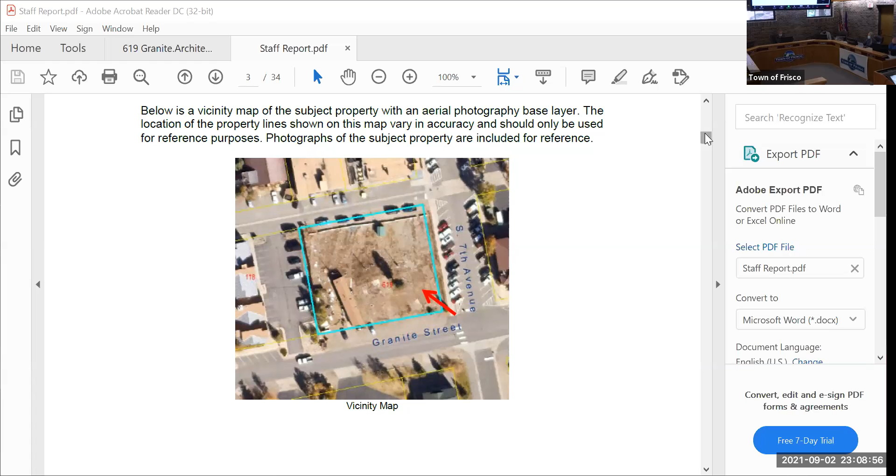As a reminder, at the May 20th sketch plan meeting, commissioners liked how the project was overall, but they did want the architecture to have some modifications. Specifically, the ridge lines needed to be broken up, there needed to be more material accents, and it was requested that the bulk plane encroachments be reduced.

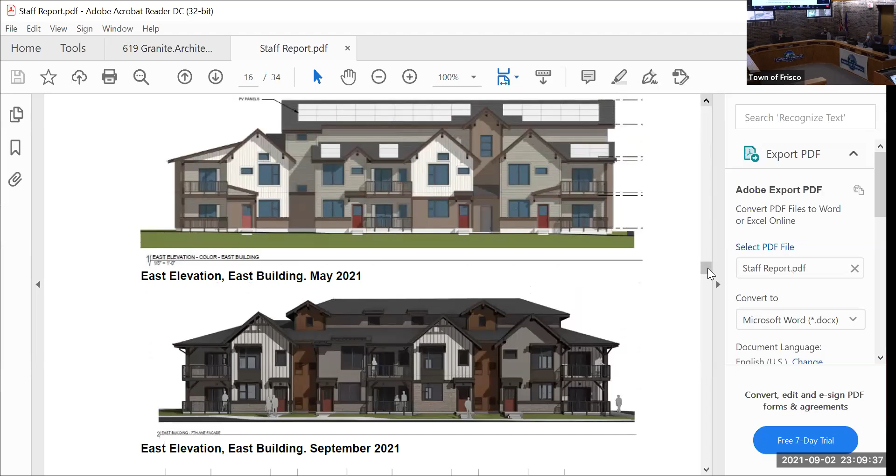So in the staff report, I'll put up on the screen some different images to show the planning commissioners what changes were made, so you can see how they were addressed. The same goes for bulk plane, and the applicant did take the planning commission's feedback and reduce the bulk plane.

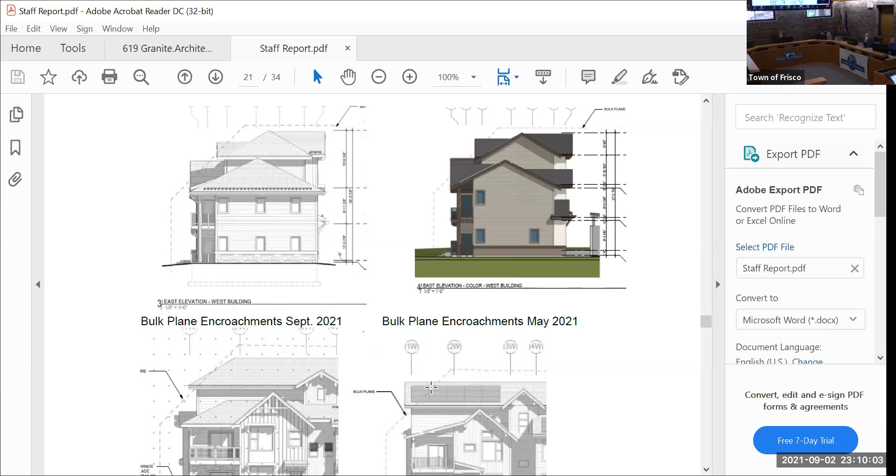I can go to more pictures if you'd like. You can see they still have bulk plane encroachments, but they have reduced them, especially on some of the elevations. For example, the south elevation of the west building was dramatically reduced based on comments that the planning commission provided.

As a reminder, the planning commission can find that bulk plane encroachments up to 350 cubic feet are okay if they provide substantial architectural relief and advance the intent of the section of code. The amount being proposed is approximately 255 cubic feet, which is referenced in your staff report and included in the findings suggested by staff.

The last part of residential development standards to review with you are the proposed exterior colors, which are earth tones including grays and browns. The applicant had modified the proposed white color; they had originally proposed pure white at sketch plan, and that has been amended to be eider white at this time.

Wrapping up the staff report, parking, snow storage, waste, the dumpster, and lighting are all in compliance with the town code. Landscaping is the one other outstanding item town staff wanted to reference. As you saw in the staff report, the landscape plan does not comply with plant sizes, species diversity, and water conservation. We did suggest a special condition that a revised landscape plan showing full compliance with the code be submitted prior to issuance of a building permit.

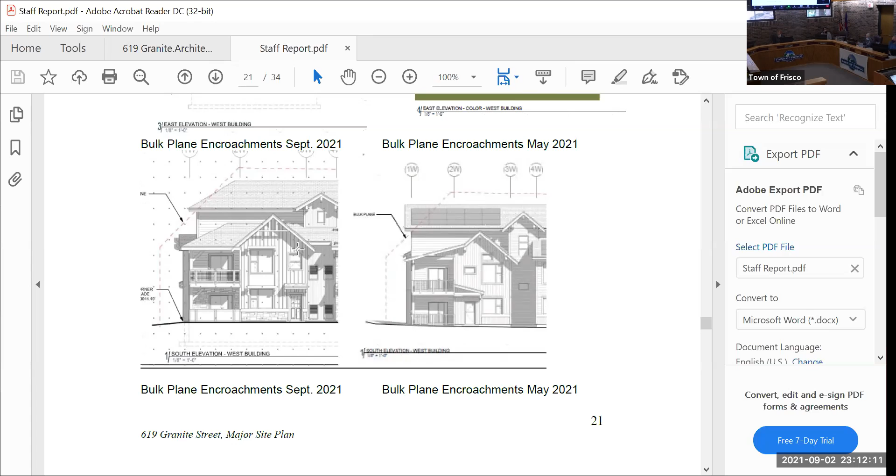As I read it, it's a rental project, right? 22 rental units. Is there any legalese that keeps them as rental in perpetuity? And I know you said some of them are bonus units and some are by right. So as an accessory question, does the scale as to how they regulate the rents come under our purview, or is that not mentioned?

It does not come under the planning commission's purview. Good question. The only thing under your purview related to how the rental units will be rented is to ensure that 7 of them meet the covenant, the town covenant. So now you're making me do math - that leaves 15 more units out of 22. So the other 15, are we assured that they're rental in perpetuity? You cannot be assured, because it's not required by town code.

But CDOT - I'll let the applicant speak more to this - I believe CDOT and the town of Frisco are very focused on providing housing for locals, and that is the intent of the project. My soapbox is rentals, rentals, rentals. That's what's missing in the equation of privately owned properties - there just aren't enough apartments, period. Correct, but we can't require it. I'm gonna take that up elsewhere. Thank you, good clarification though.

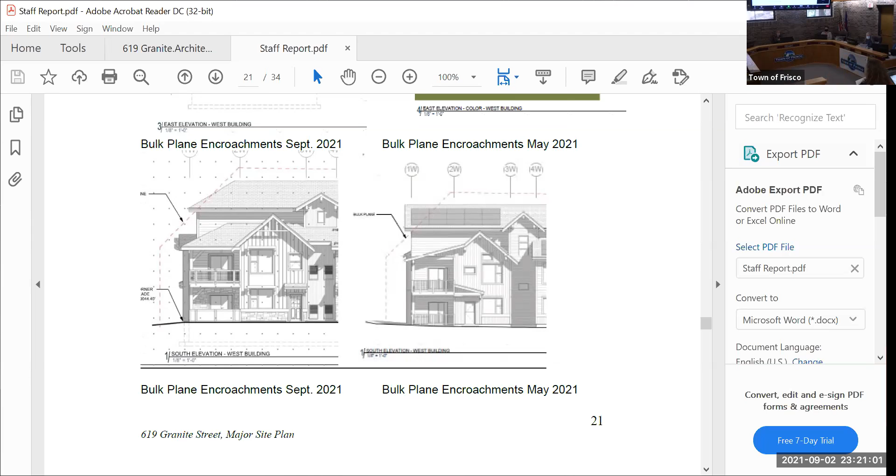Everybody—okay. I know this is very hard because we've all been acting in different roles, but we're doing our best. We are really excited to be here presenting final site plan review for this project. The design you see has been months in the making, a collaboration with town staff, town council, CDOT, and the design team led by Studio Architecture. We've been working so hard because we really want to deliver 22 units of rental workforce housing to the community. The town, town council, and CDOT are all committed to making sure those are rental workforce housing.

As Katie mentioned, 7 of them are required to be deed restricted using the town's restrictive covenant. We're still working out what types of covenant would be placed on the remaining units—it may be the town's restrictive covenant, it may be something stronger, or it may be a combination of the two. Right now CDOT, and I'll let Aaron speak to this in a second, also has their own goals in terms of affordability they're trying to meet for their workforce.

The main goals we collectively established for this project were to maximize the number of workforce housing units we're able to accommodate, ensure high quality livability for residents, maintain affordability, and deliver an energy efficient, sustainable product that meets not only our town code standards but also CDOT's LEED Gold standards. We've been moving forward with those goals in mind, with both CDOT and town council aiming to meet them by working within the town code requirements.

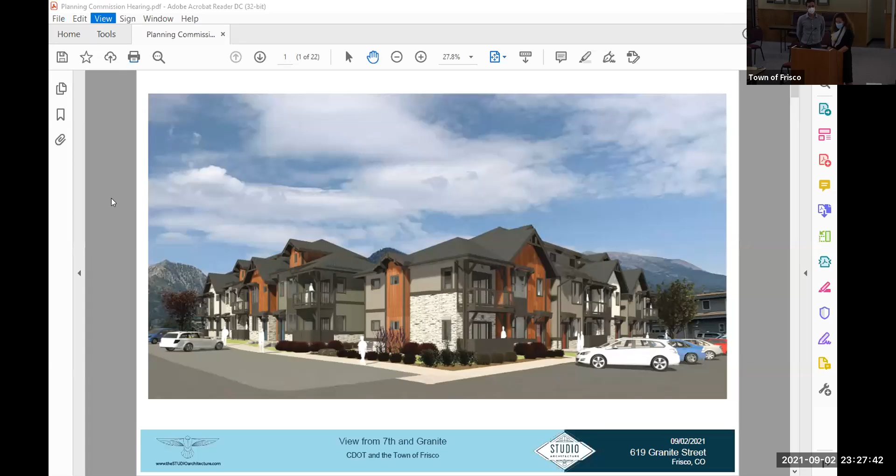There we are. And then you can just drive like that.

All right, thank you. I'm happy to be in front of you in person today, and I know you can't tell right now, but I'm going to try and smile with my eyes since you can't see my face. But let me know if you can't hear me.

Just representing the town and CDOT to present this project to you again, I'm really proud of the process that we've had, the work that we've done with them, and with you, the comments that we've received as well. There's not a whole heck of a lot more for me to say. Katie, I think you did a great job summarizing the project and showing the background in the staff report. Eva, Susan, I think you guys did a great job introducing the project as well, and Aaron from CDOT's perspective too.

So I get the fun job, I get to play cleanup here and talk about the fun architecture. But what I'll do is dive a little deeper into the efforts made since our last meeting with you guys, as I think Katie did a great job in her staff report showing where we were and where we are now, based on comments and the collaborative efforts of this entire team.

So what we did over the past month or so since we met with you, we toiled with the whole design team - this was the town of Frisco, this was CDOT, this was the studio group as well.

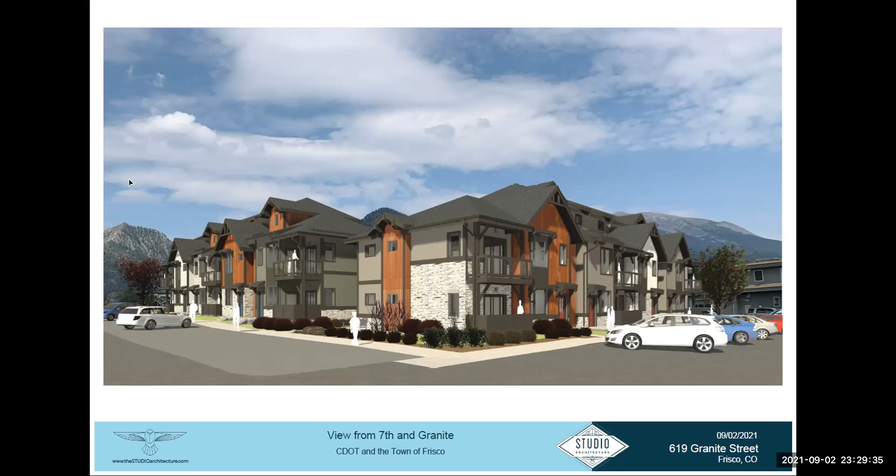We toiled with the ways to integrate comments from you guys in a good way - how do we integrate these comments, how do we improve the building and the architecture based on those comments to really balance the things already talked about: code compliance, the vision of the town staff, the vision of town council, the vision of you guys as plan commissioners, the vision of Frisco as well as CDOT as the owners. So that's what we've been working on.

And I think we're all really excited to present this project to you, as you can see on screen, what an exciting project it will be for the town architecturally speaking, and to deliver a use that I think is much needed, that everybody knows about for housing.

But a lot of what plays into the power of this project is such an amazing site for this. There's access to amenities - retail, recreational, religious amenities. It's in downtown, close to the highway for the CDOT employees. There's a lot of great access there, and it's going to be integral to what makes Frisco such a great place.

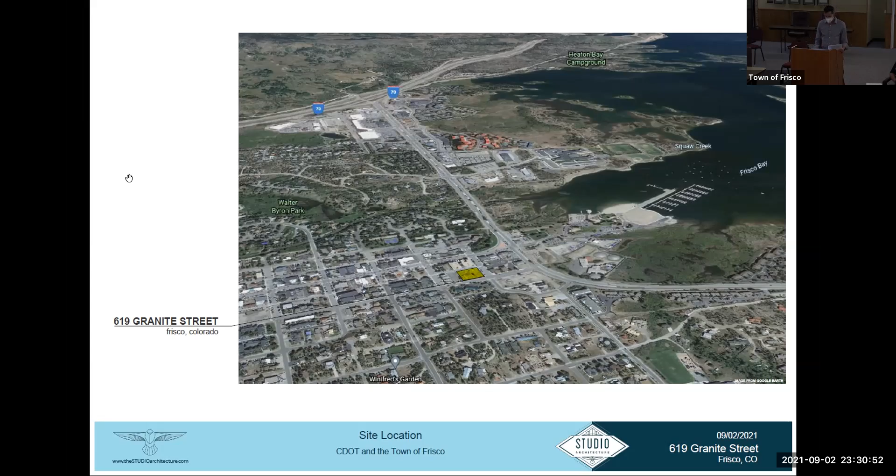The site plan - we've talked about the technicalities of this and quite honestly not a lot of that has changed since we last met with you guys. As Katie and Susan mentioned, there's two buildings, one facing Granite, one facing 7th Ave.

There's a Paseo we don't talk about a lot that bifurcates both of the buildings, and that allows permeability and walkability to the public into this site, which is part of the vision of the town code. There's 11 units per building, so 22 total. We've already discussed that, and the mix is 1 bedrooms, 2 bedrooms, and studios, so there's a good mix of opportunity there for differentiated units.

I know this came up as a comment last time - what's the accessibility look like in this building? The ground floor units are all accessible. All of the buildings are type B accessible, and the unit on the east side of the west building is a type A accessible unit. What that means, I'm not sure if you know, but that's a higher accessibility that's required by code to deliver that product as well.

There's 33 parking spaces with a required 4 guest spaces on site. The EV ready and EV capable parking spaces will be provided per code - correct me if I'm wrong, but that's 2 EV ready spaces, meaning it's ready to plug and play, and the capable spaces, 7 of them, will have conduit run to them, ready to run the wire.

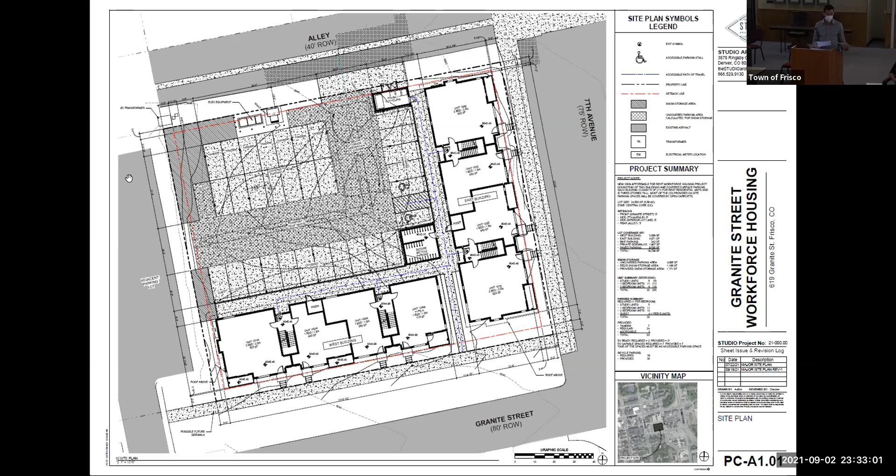One of the main goals, as we mentioned, was sustainability. And this is something we looked at throughout the entire process of this project.

I know this came up during our last meeting with you at minor site plan. We presented the carports, and identified those, especially carport A in the northwest corner of the site, as being a great place to put photovoltaics due to access to the sun. You rightfully asked, since we didn't have these solar studies, to prove it, so let's take a look and see if it's actually going to be accessible for photovoltaics.

So this is what that slide shows. At the bottom is December, the worst part for shadowing. At 10 a.m., on the bottom left, it's slightly covered, but throughout the rest of the day and year it will receive great solar access. And just to go a bit deeper into PV, the photovoltaics will also be raised a couple feet, which will increase their access.

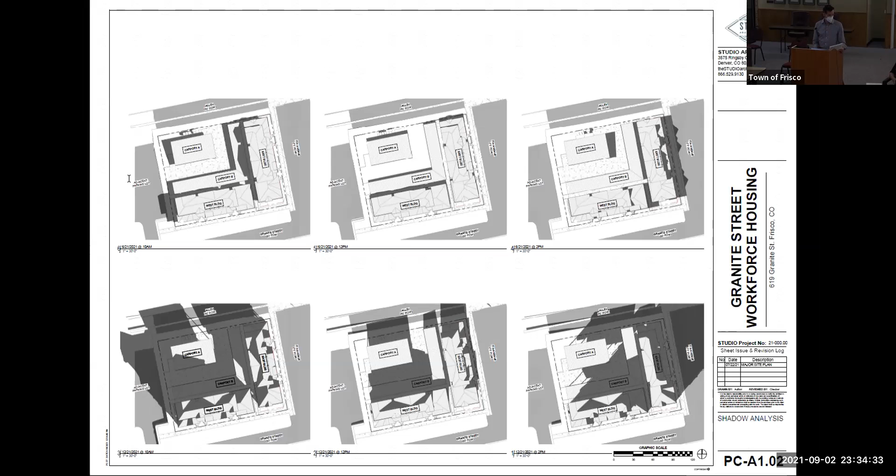Off the roof, you mean? Raised a couple feet off the roof. Correct, you said off the PV. We're just going to stack them. Yeah, no, here—thank you for the clarification. You're right, a couple feet off of the roof. Two feet, per town code. Yeah, thank you for catching that.

Just as a side note, we've talked about PV in all of our weekly meetings, how to slope these roofs. There's a lot that goes into that and a lot of thought that has gone into this. I'm happy to dive deeper if you guys want some background there.

Can I ask a PV question? So the electricity collected off of that carport, is that going to be piped into the general meter area? There's an extra line in the electricity one-line diagram—that's a separate meter for that. So how that's going to work, we're still talking with Xcel. We've been talking with Xcel for months now about the best way to do that. There are ways to do it, and we're still in discussions where we might receive some credits and lower utility fees if we just run the electric vehicle chargers from a meter.

It dives really deep, deeper than I can go, but if I had a recommendation: the credits they give us are wholesale, and if you're using it to charge vehicles, that's retail. You're getting first crack at the electricity.

Sure, and that's something I think ownership needs to talk about—how we meter these and how they do it in the future. That's a great question, something we've been asking for months. Thank you, good question.

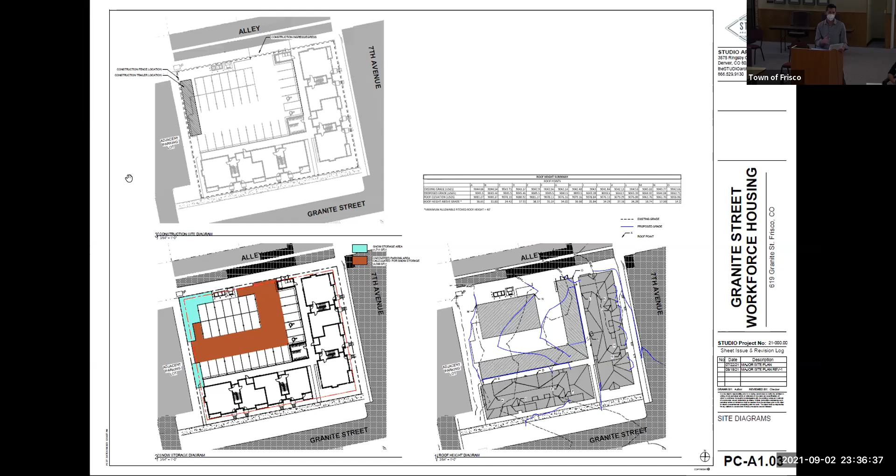Some site diagrams here—I just wanted to quickly touch base. We've done everything to tie this back and support the town code. As Katie mentioned, we've respected the setbacks on the third floor, even in the middle of the design process. These diagrams show snow storage and building height, which we comply with. So another main goal is to comply with as much of the town code as possible.

Floor plans here, not a lot—I don't want to be too redundant, but it shows the mixture of one-beds and two-beds on the ground floors, and then the third floor where the setback is, which reduces those units into studios. Something to note is that these are walk-up flats, a bit of a unique housing type—there's no elevator or long internal corridors, and that's again to focus on affordability. You don't have to pay for elevators, or manage and heat that common space.

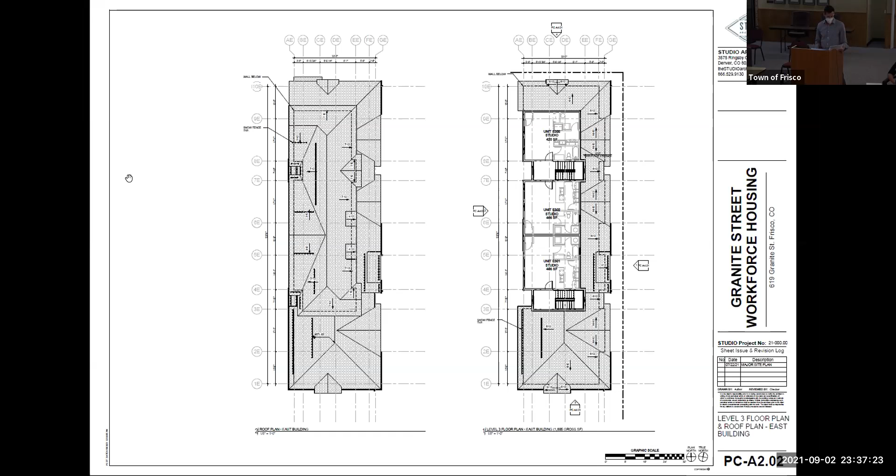Again, floor plans—I'm going to skip over these. Let me know if you want me to come back to those.

Carports—quickly to touch on these and some of the design that went in. Low slope roofs minimize the mass and maximize snow retention. There was a lot of conversation about the snow and its impact off these roofs. The low slope allows the snow to slowly melt into heated gutters and downspouts, which are connected directly to the below-grade storm sewer, diverting it as much as possible so it doesn't become an ice rink.

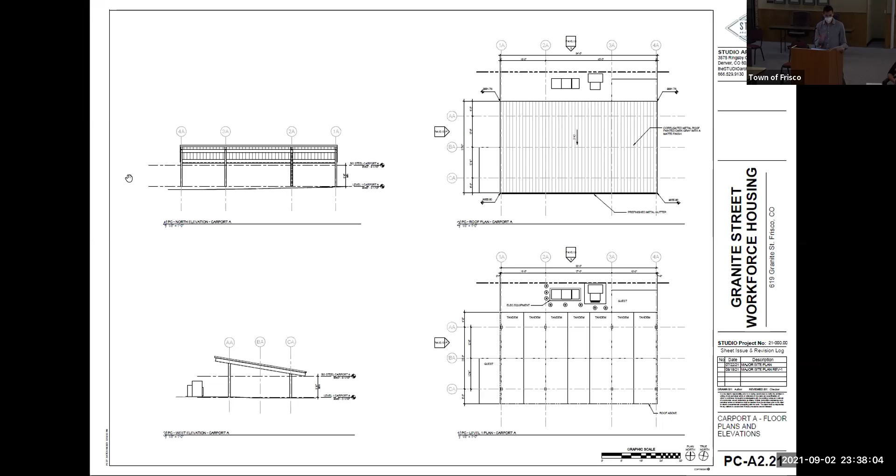Again, carports, a thing to notice here. I know Katie touched on it in her report. In the knuckle of carport A is the bike parking, where all of the long-term secured bike parking will be. I believe it's 28 spots there. A great tenant amenity.

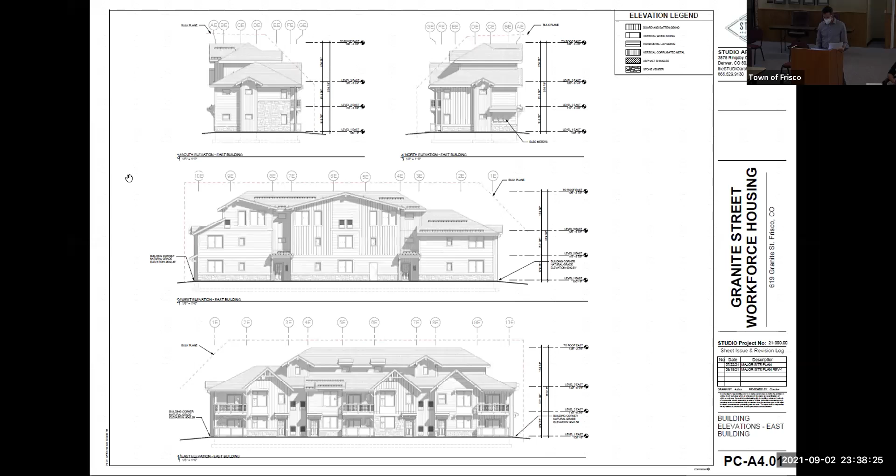Elevations, we talked about these. I'm going to go right to the pretty pictures here, as I think these do a great job, and I can back up if you want me to at any time. The building images, I think this is where it gets real exciting for us, because the architecture and design there, it's kind of obvious.

This shows the new look and feel of the architecture, based on the commission's previous comments. A lot has changed from what we presented during the minor site plan. Katie, again, those were great diagrams before and after. I'll dive a little bit more into those.

We've eliminated the pure white color, and these were all comments from staff or from the commissioners. We changed the pure white color to an off-white color. We didn't just downplay the color, we also reduced the amount of that off-white accent color, so a lot of that is gone away. We've also darkened all of the colors, so I think you see around the board, the colors are darkened as well.

We've reduced the amount of gable roofs. One of the comments was gable, gable, gable, marching down the street. So what we did was implement some shed roofs as well, to provide a more unique and modern feel to the facade and minimize the redundancy of those gables.

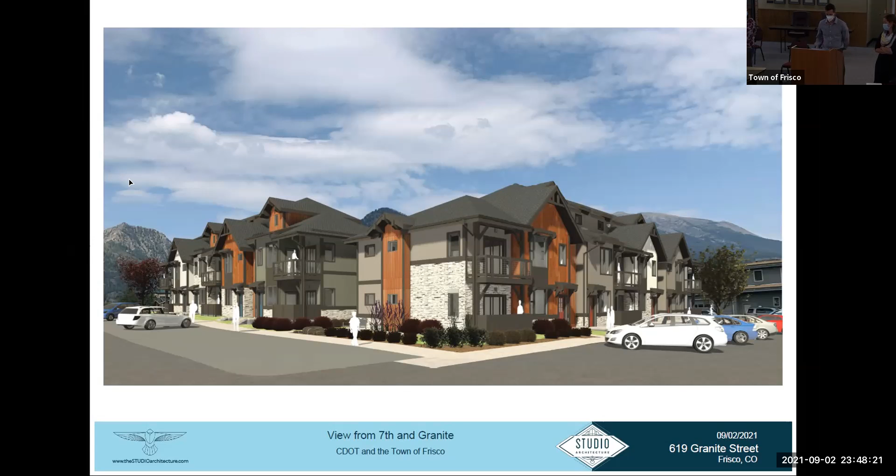Thank you, Donna. Robert, questions for the applicant? Chris, can you talk about, I'm appreciative of all the changes you've made to bulk plane encroachments, but you've got one very large one, of the 279.25 cubic feet of bulk plane encroachment, one of them is 137 cubic feet, on the side of the west building. Can you talk about how that meets town code architecturally? You've got to sort of convince me of this.

Well, hopefully I can be convincing here. I don't, so I think what you're— can I interrupt really quick? So what the planning commission definitely wants to take into consideration from the code, staff may approve— apologize, I'm reading the wrong part.

The significant architectural relief standard is that building forms may deviate from the standard and project beyond the bulk plane if they do not exceed maximum building height, which this doesn't, and provide substantial architectural relief. So what you want to definitely focus on is how it provides substantial architectural relief.

Absolutely, thank you. Yep, so right here, I think the one you're talking about is in the bottom right corner, right? That's the main one. And so what we did notice in working with the town and looking at the code, our previous... Thank you, so right here, this used to be in plane with the first 2 stories.

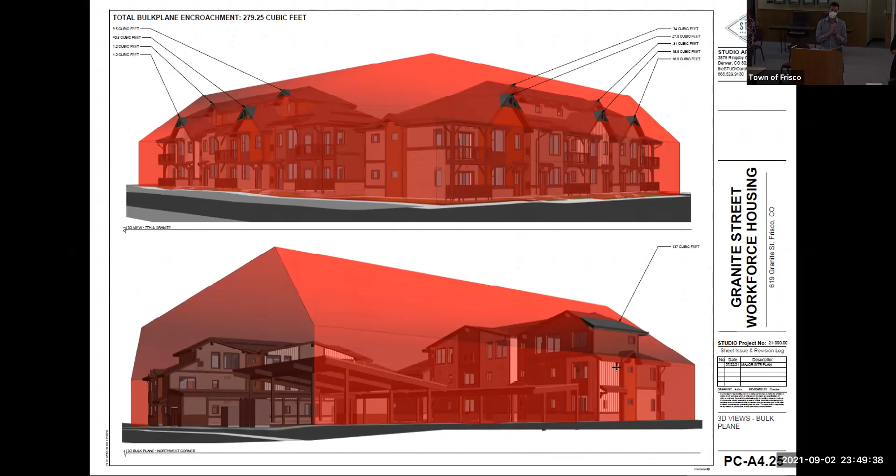What we heard from Planning Commission last time is you're not convinced with the previous aesthetic of looking at that west facade. We do have an image of it. I wish I had the previous diagrams here for what it is now. So it was out flush with the first and second floor with a gable roof. Not only did we not succeed at providing enough depth, architectural relief previously, and that was pointed out by you guys, the commission, we also didn't meet the bulk plane requirements. We're asking for over 300 cubic feet, which exceeds town code.

So this modification, we set it back 2 feet. Why we didn't set it back more is because that would kill the 1-bedroom unit that's in there and bring it over to another studio. So instead of adjusting the mix that far, what we did was we moved it back 2 feet, created more architectural relief. We put a hipped roof on it, which reduces the mass of the building, right, some more commission comments there as well. And we were able to retain that one-bedroom unit up on the third floor, which gives some square footage to a tenant there.

Does that answer your question? Yeah, I struggle with it because I understand why. I also know that some builder is going to come in here next year with a 137-foot bulk plane encroachment and try and convince me that we approved this one, so why aren't we approving his or hers?

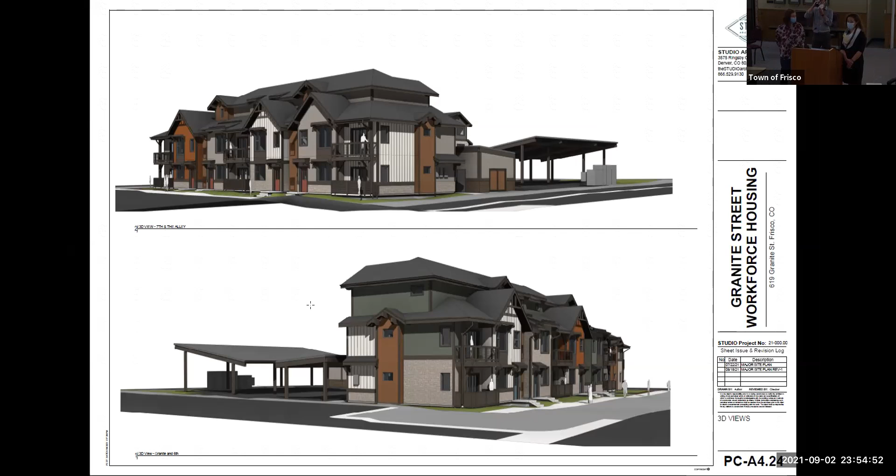Planning approval is a key step, I'll tell you that much. Like Aaron mentioned earlier, our agreement with CDOT, our current contract says we will work through 80% CDs. We will take those cost estimates and then negotiate. CDOT and the town are in the process of negotiating the financials behind the project. Obviously it's expensive and there's a lot of moving parts. So gaining planning commission approval is a key step so that we have a project that is approved and buildable, and moving on from there.

Yeah, there's so many things we're working through. Who's going to own what percentage? Are we going to do 11-11? Are we going to do 15-7? Will there be a deed restriction on the property itself, since CDOT owns it, so that it stays in rental in perpetuity? Those are the things we are talking about. It's written in pencil, and until my chief engineer, executive director, and your town mayor sign them, I can't say anything for certain.

So yes, we've been talking about it for a couple of months. I think we are all in agreement and going in a very positive direction together, but it's not signed in ink, so we can't commit to anything at this meeting that says it will happen, because you never know what could happen. But, do you have a development agreement, or not? No, our only agreement that's truly signed and executed is the agreement to pursue 80% construction documents. And part of that is getting final site plan approval from the town, so we have a project to build.